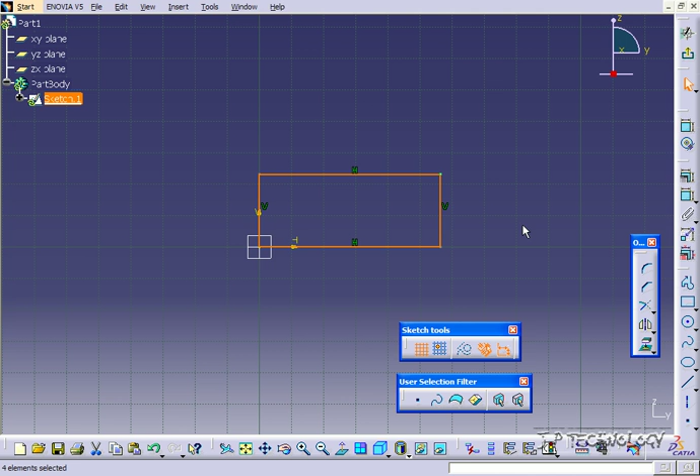Let's dimension this rectangle to 50 by 100. So we'll click the constraint, click a line, and pull it up. When you pull it up, you now have the dimension. To edit it, double click on it, and let's type in 100.

Now let's dimension the height, so let's click constraint. Last time we just clicked the line. This time let's click two lines, so we're doing the distance in between here, which is still just like clicking that one line. So let's click this line, and we'll click this line and pull it out. Now again, double click on it, and we'll type in 50. Click OK.

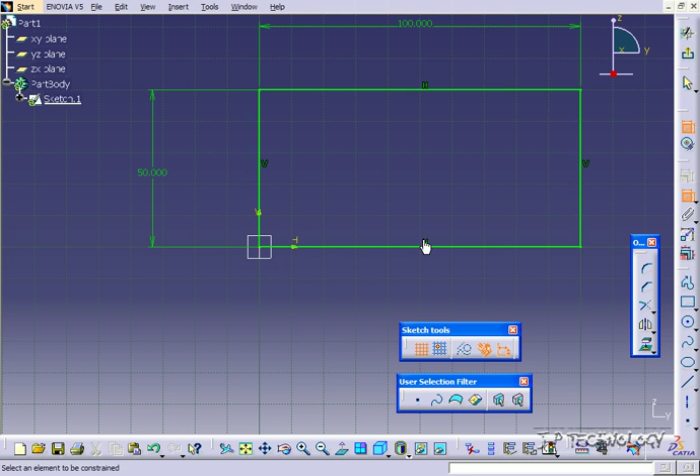Now, if I was to put another dimension on this side for the 100, you'll notice that it will be purple. When you see purple such as this, it means that your sketch is over-constrained. So if I am to go in here and edit it, it's going to disrupt everything, and it can't happen.

It's over-constrained, it's not going to work. So whenever your sketch turns purple, it's over-constrained, and you're going to have to delete a dimension. So I can either delete this one or this one to make my sketch normal and not over-constrained. Let's delete this one up here, and now everything turns back green. Green, good to go, everything's fine, nothing's over-constrained.

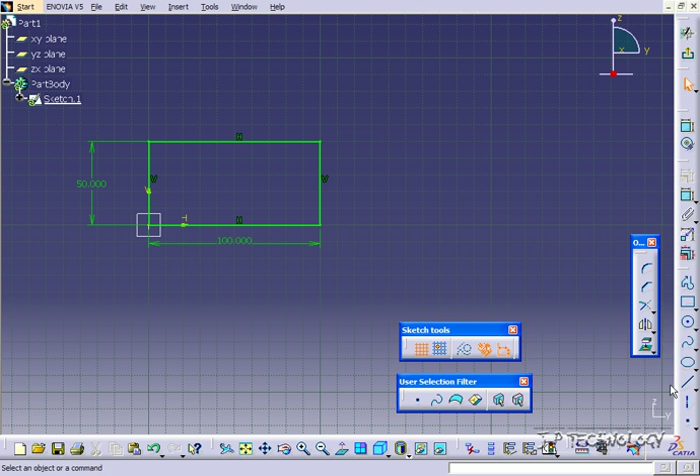Now let's draw a few lines. So let's click Line, and we'll draw a line just like this. You'll notice that the blue line means that it's at a 90, and when I put it on an angle, it's back to white. When it's in line with that sketch, I'm getting that blue line, so I'm able to make it the same height as that. So let's make it the same height.

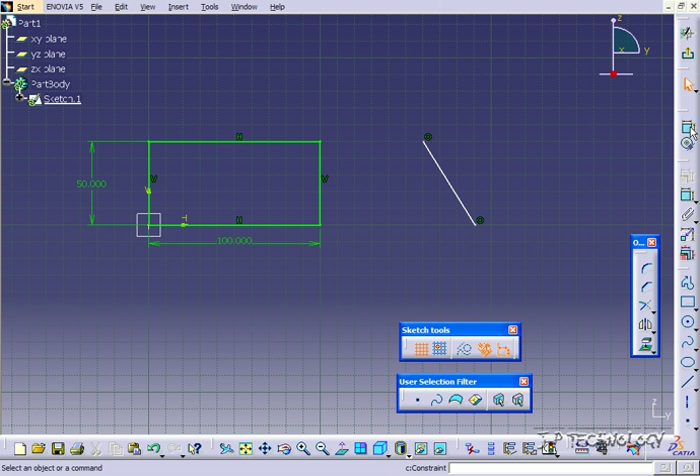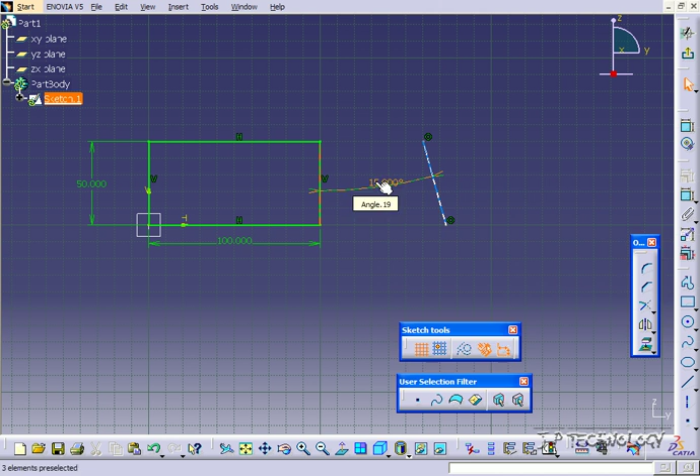Now let's do an angle, this angle from here to here. So let's click Constraint, and we'll click this line, and we'll click this line, and we get an angle. Now to change it, we'll double click on it, and let's change the angle to 15 degrees. Click OK, and now we have 15. Now let's double click and we'll change it to 70, and now we have a 70-degree angle.

Now if you double click on the angle, you're also able to choose the angular sector, so it gives you different dimensions for different sectors. As you can see, as I'm scrolling through and selecting each one, I'm getting a different angle for it. Now, most of the time it's going to give you the smallest angle, the one that you want, but sometimes it doesn't, so you may have to go through and toggle through the sectors to get the right angle. So we'll click OK.

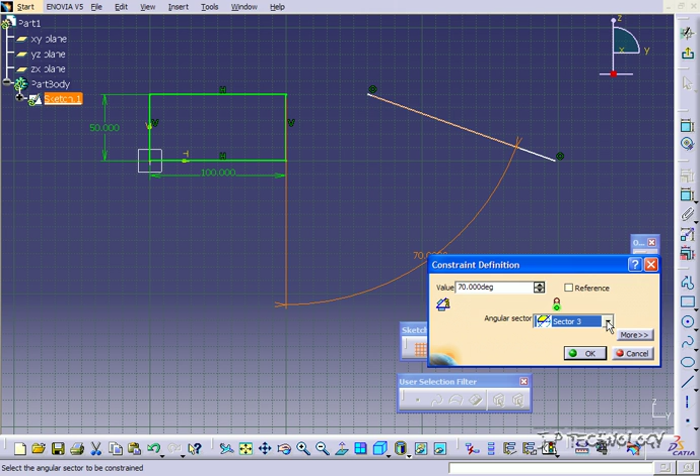Let's delete this face here, and let's just close up this sketch. So we'll click this line, and we'll connect from that point to that point. You'll notice whenever you connect point to point, you'll have a circle filled with a dot in the middle. Now if we click from this point to this point, and say we're just on the line, you're just going to get a circle with a line through it, meaning that it's coincident. If you actually have it right on the dot, you're closing the sketch.

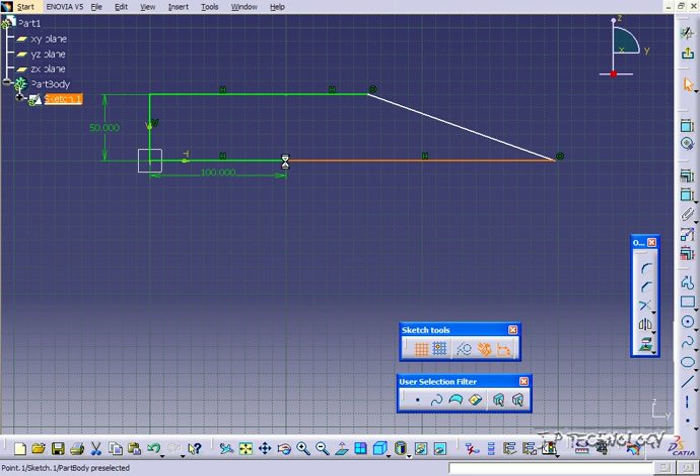So let's close that there, click OK, and we'll exit the workbench, and now we've created our sketch there. And that concludes our tutorial on how to dimension your sketches within CATIA V5.